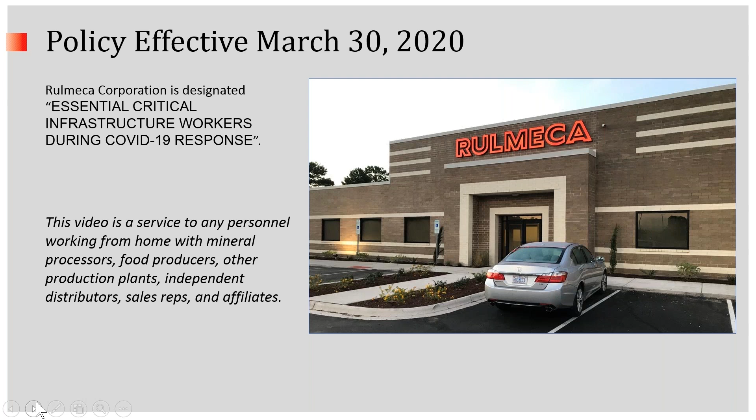Our topic is addressing maintainability. We suggest that you always identify your conveyor drive problem, request technical assistance, consider a potential technical solution, and then obtain and consider a commercial offer.

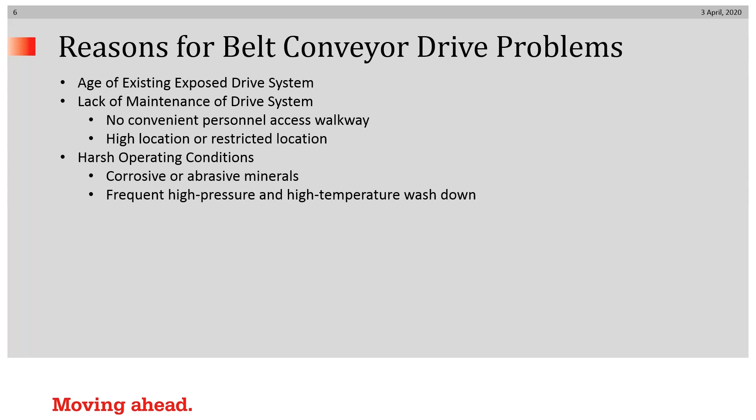The reasons for belt conveyor drive problems are pretty much always the same thing. It's either the age of an existing exposed drive system or the lack of maintenance on that drive system because there's no convenient personnel access, or because it's a high location or restricted in some way, or because the components that need to be maintained are in a harsh operating condition. The materials are corrosive or abrasive, or frequent high pressure washdown is necessary.

We would, of course, recommend that you contact your Rulmeca representative, whether it be our local rep, our local independent distributor, or one of us. We would like to know if you have a new project or a system conversion. Most likely, those folks who are interested in today's topic are going to be wanting to address some sort of a conversion to an existing maintenance-prone conveyor drive.

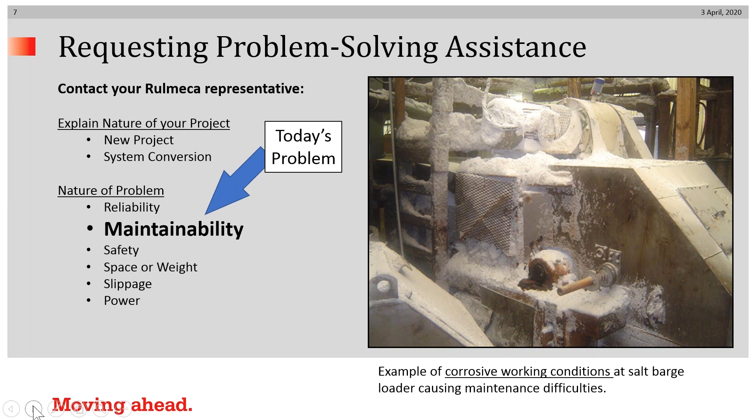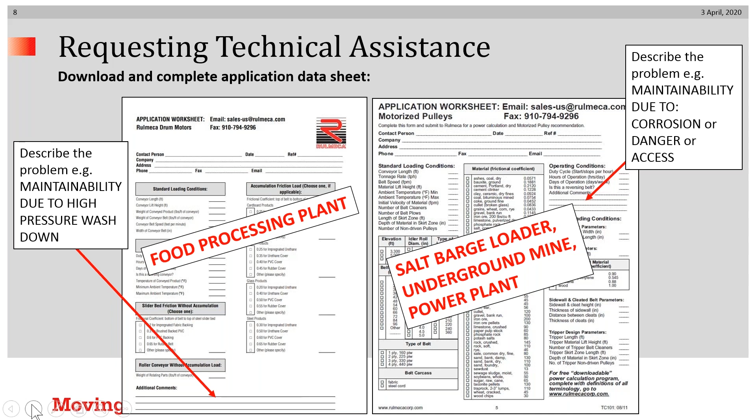On the right is a similar app form, could be used for any kind of a bulk handling application. And you can see the comments section might take the form of, I've got a maintainability problem because of corrosive material I'm handling or because of the danger of personnel access or whatever. We would encourage you to use them, send them in, or you could use the online equivalent.

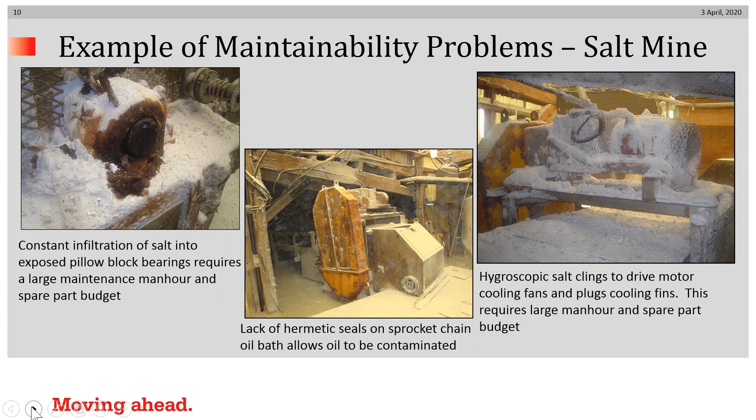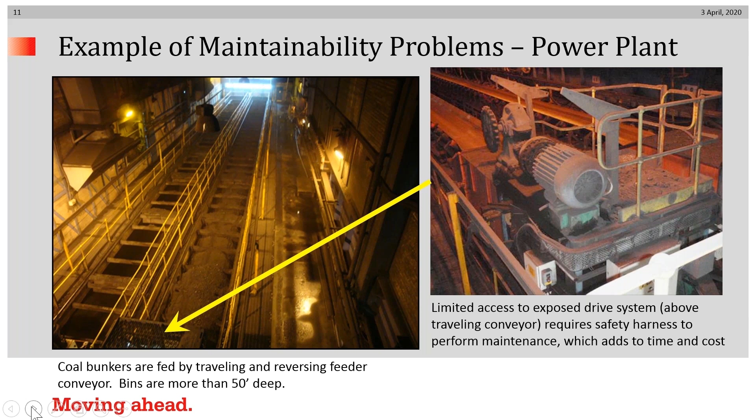Notice that it's above. Access is limited. This photo was taken prior to its removal, and it would be a good idea to use a harness when addressing maintenance issues on this drive. And we'll talk about that more in a different video.

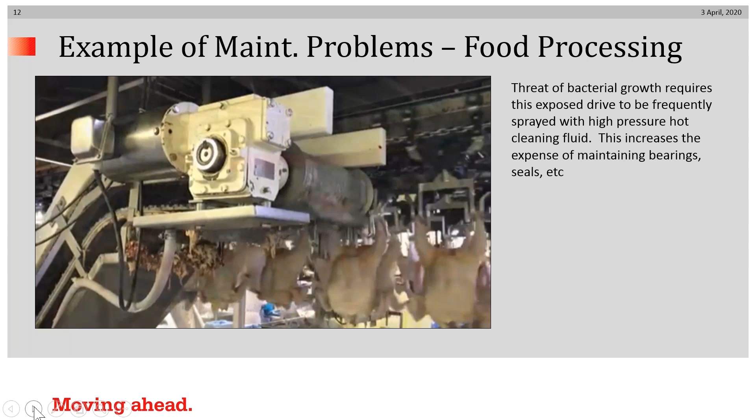The final example is taken from a food processing application where you can see the threat of bacterial growth requires that exposed drive to be frequently sprayed with high pressure hot cleaning fluid. And of course that increases the expense of maintaining bearings and seals and putting man hours at it.

This is our offer as a solution to maintainability problems. The idea of a motorized pulley is something that's unfamiliar to some people at this time, and you might not be aware that this device is hermetically sealed, internally powered, and self-lubricating.

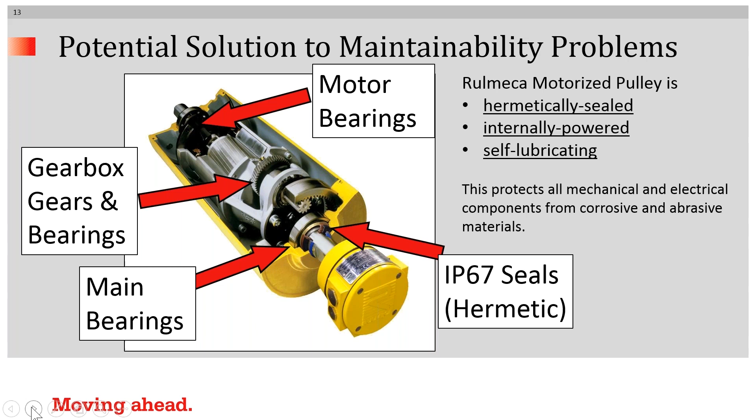This cross section allows me to elaborate on how that protection works. The hermetic seals are protecting the two bearings, which would normally be external pillow block bearings. The main bearings that take the full force of the belt are within the pulley itself. You'll see that the motor rotor bearings are in there. They are automatically maintained by the oil.

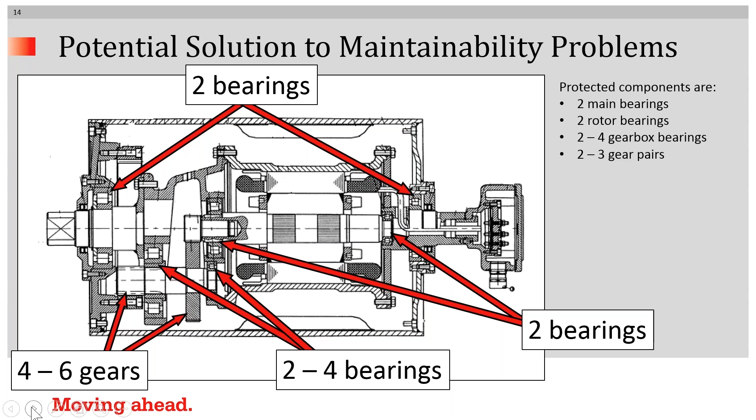Ordinarily, an exposed drive system has a motor which is never going to see grease. The motor bearings will never see grease once they leave the production plant. This one runs in oil. And last but not least, you can see on the left that the 4 to 6 gears and the 2 to 4 bearings within the gearbox are also enclosed in that environment.

Prior to shipment, the motorized pulleys are filled with oil, about 33%. That oil circulates through the means of a couple of drip lips, and that oil is continuously lubricating those 6 to 8 bearings or the 4 to 6 gears, whatever. And notice that synthetic oil only needs to be changed every 50,000 operating hours.

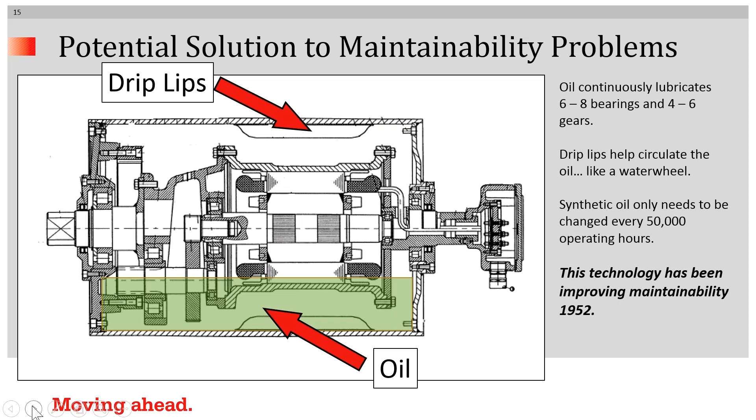So this is our recommendation on how to address certain maintainability problems. And notice that we began this technology in the early 1950s. This is not a new idea.

If you request technical assistance, either from us or one of our independent people or our sales reps, the answer is going to take a form something like this. If you need assistance in figuring out how much power is required, we could do the calculations and provide it. Of course, the software that would enable us to come up with this answer is also available to you do-it-yourselfers, available from the website in a downloadable form.

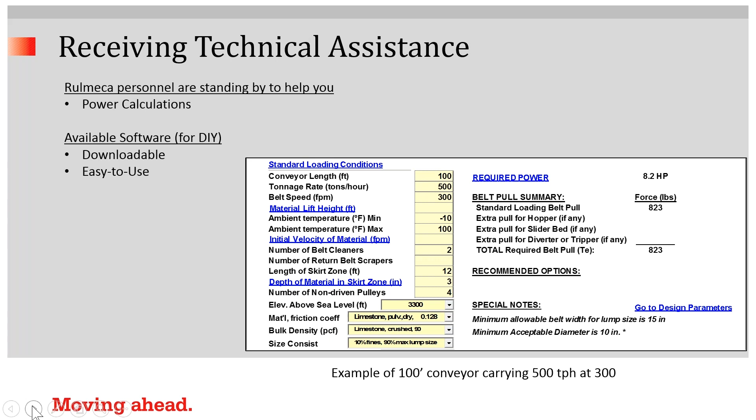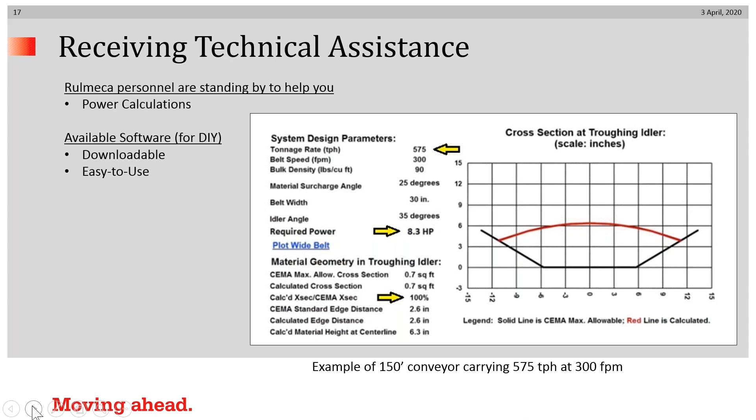This example is from a 100-foot-long conveyor, and it shows that we recommended to this customer that he needs 8.2 horsepower. Here's another example of a technical answer from us. This one is from a 150-foot-long conveyor carrying 575 tons per hour. You can see that the cross section is depicted here as optimal. The belt speed and belt width decision was optimized so that it's carrying exactly the maximum amount that CEMA recommends.

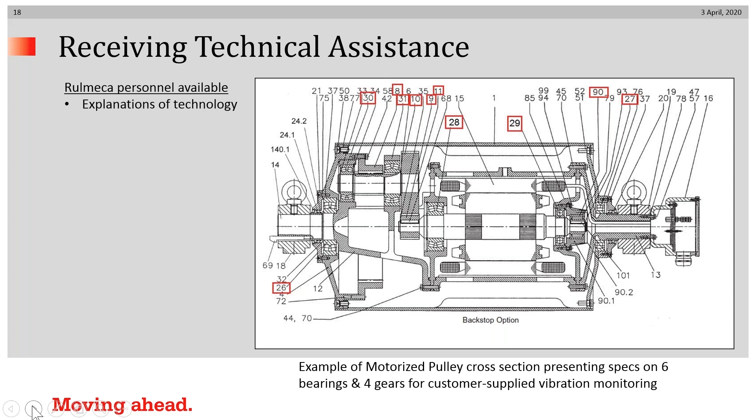Another form that technical assistance from Rulmeca would take would be something like this. This is a diagram taken from information that was put together for a customer who wanted to purchase a drive and use vibration analysis to maintain it. So the numbers highlighted there in red depict the bearings and the gears that we presented specs on so that the customer would know how many rollers were in each bearing, how many teeth were in each gear, and so forth for the vibration analysis technician. That's just one example of a technical package that would be forthcoming.

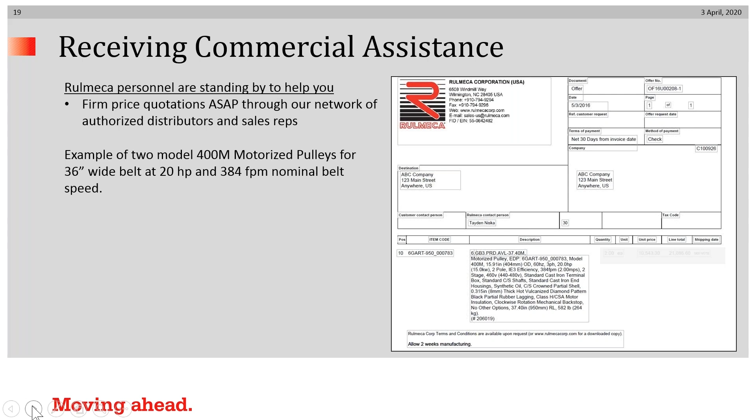The commercial offer is going to look like this with a specification, a part number, a price, a delivery promise, and so forth. This one happens to be for a couple of 20 horsepower motorized pulleys.

As I mentioned previously, since we're designated essential, we're going to keep the doors open. We'll be producing and repairing motorized pulleys from our Wilmington facility just as long as it's legal to do. And we hope that the stipulations that we now see in place around the world will eventually be relieved.